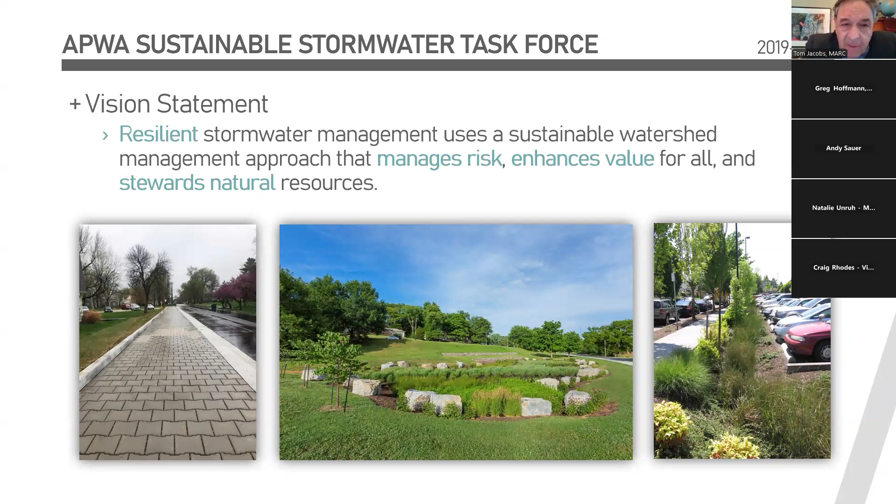On the background here, the task force recommendations charged us with doing a whole bunch of different things. It's important to note that the first one is really to combine water quantity and water quality design standards. All the way back in 2003, when we began the last update to this process, we said we want to combine quality and quantity in 5600. The culmination of that work was the development of a BMP manual along with the updates to 5600. At this time, we're combining those two documents into one piece to have a more integrated approach that more meaningfully addresses this point.

The design criteria previously just addressed greenfield development, and our new proposed approach also addresses redevelopment standards, and we'll dig into that in more detail. It's an important element because according to the vision statement, we really want to make things better at every turn, and dealing with redevelopment issues creates opportunities to do that perhaps we haven't had in the past.

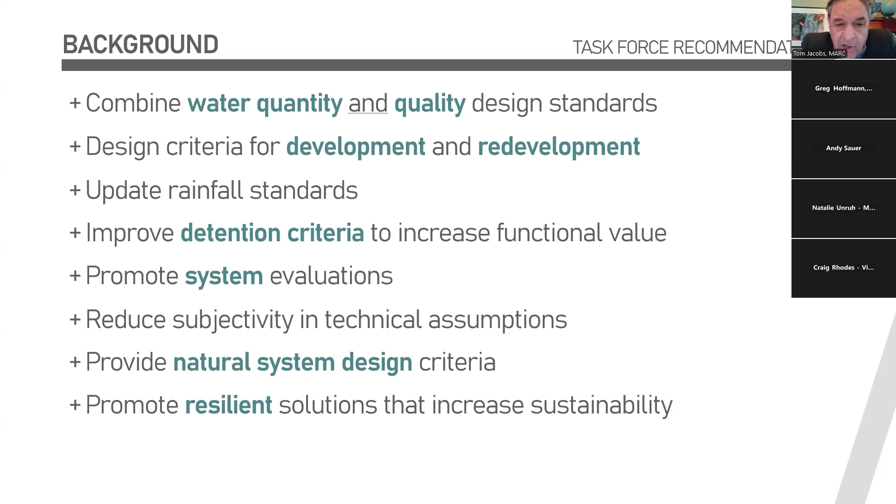All of this work began, as I mentioned before, back in 2019 with the APWA Sustainable Stormwater Task Force, and the recommendations were advanced to the full membership of APWA and the APWA Executive Board. And so those were authorized, and APWA asked MARC to facilitate the whole process.

There was actually a discussion around whether this project could be managed on a volunteer basis from within APWA membership, and there was clear consensus that the intricacy and complexity required more of a full-time administrative and facilitative approach, which led to MARC working on this. We convened, then sent out letters essentially to every public works director in the metro area asking for support and funding for this. At the end of the day, 32 communities contributed funding for this work.

Representatives from those communities constituted what we called a management stakeholders group. That group convened in the fall of 2022 to develop an RFP, beginning with the vision inherent in the Sustainable Stormwater Task Force recommendations and digging in a little bit deeper.

We managed through the procurement process in the winter of 2023 and ultimately selected a super consulting team. We negotiated the scope and fee in May, and we had a kickoff in July of that year.

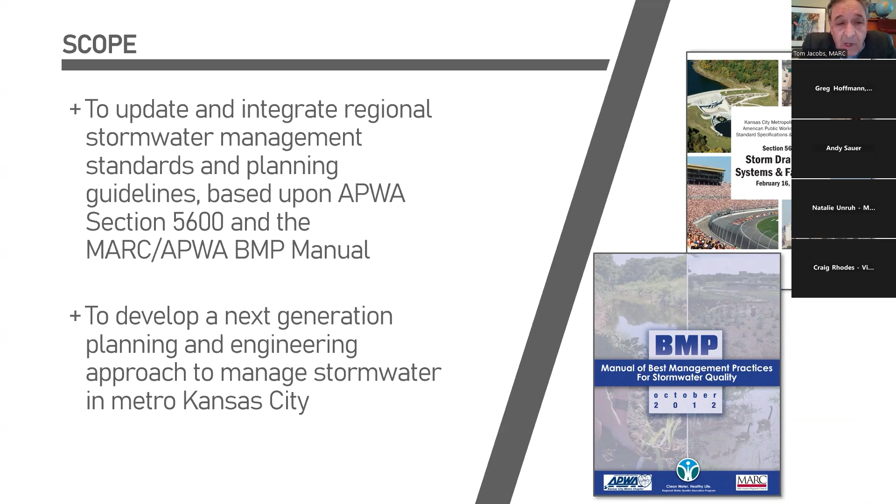As we scoped this project out, there was a desire for a very high level of community and stakeholder engagement, and we believe we've done that in spades. We're very proud of that work, and this update really reflects a new generation of thinking on how we can do a better job of managing stormwater in Metro Kansas City.

MARC serves a 9-county region in the bi-state metro with 119 municipalities. I previously indicated that 32 communities provided funding here.

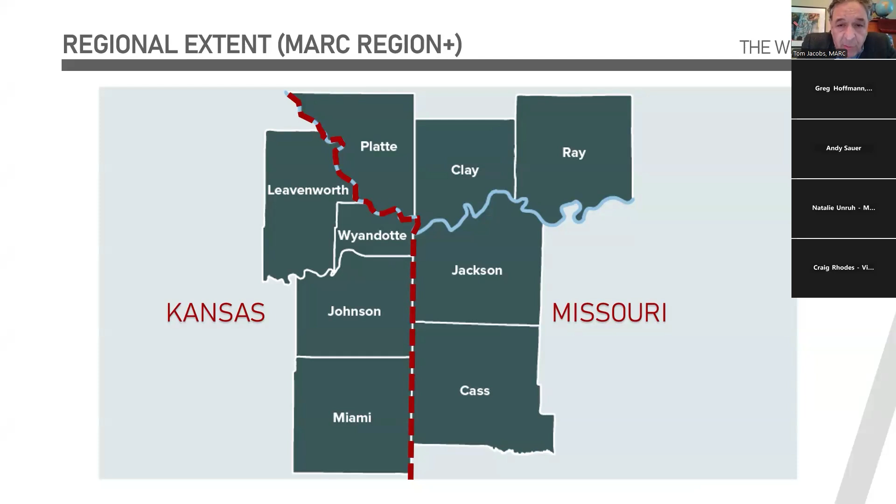Our hope is that these updates provide a consistent regional approach to stormwater that serves both large and small communities, urban and rural communities, that links quality and quantity, and that does all of this work from a systems-based approach, recognizing that our watersheds cross city, county, and state boundary lines. By having a set of common standards, we can do a better job dealing with the problems in front of us. That said, with all of the variability in our metro area, the system is also designed to have flexibility to recognize the context in which all the communities operate, so the solutions we propose are contextually appropriate.

So the team brings deep technical experience, national purview, and an interdisciplinary lens that we think is going to be fundamental to getting to where we need to go. So Andy, the floor is yours.

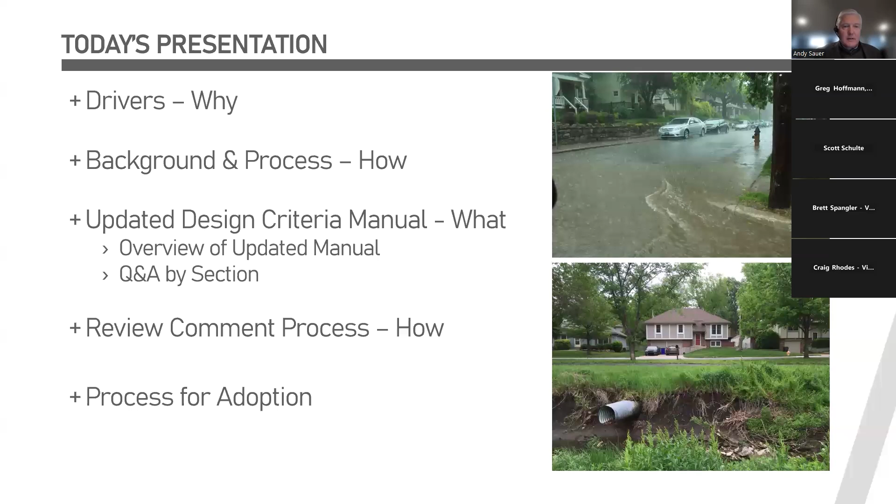Many of you have probably seen this. We've talked about this way back when we had the Sustainable Task Force, but really this was kind of the why. The big thing is we're really trying to look at ways for this metro region we can reduce the overall risk. And we have some pictures that kind of depict some of the risks that as a team we've been discussing, from more flash flooding type things to severe erosion in some of our streams, to other infrastructure that's failing because of stormwater management that isn't providing much control.

We've also tried really hard with this design standard to devise tools and design criteria, details, and specifications that will make our stormwater work harder. We want to incentivize preserving, and we'll talk about that in a little bit. And obviously many of our communities have been introducing green infrastructure for community benefits.

And the group had a lot of discussion around maintenance costs for green infrastructure. So one of our team's recommendations and motivations was really to provide additional design details and guidance, specifications, and things that we don't have in the current BMP manual, to make our green infrastructure designs much better, in our opinion, which we believe will reduce those maintenance costs long term. And so we've really focused on that.

And then trying to provide incentives and ways that we can protect and enhance our natural systems, which obviously is our lowest maintenance option if we can maintain the natural resources that we have.

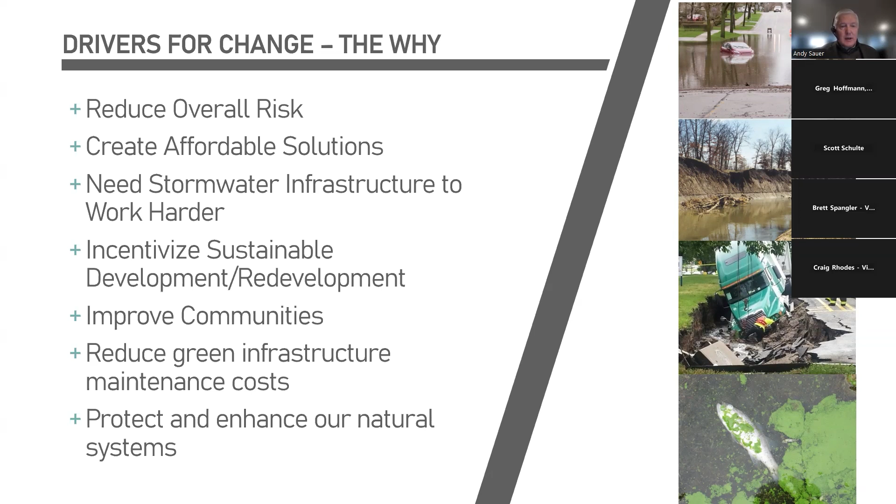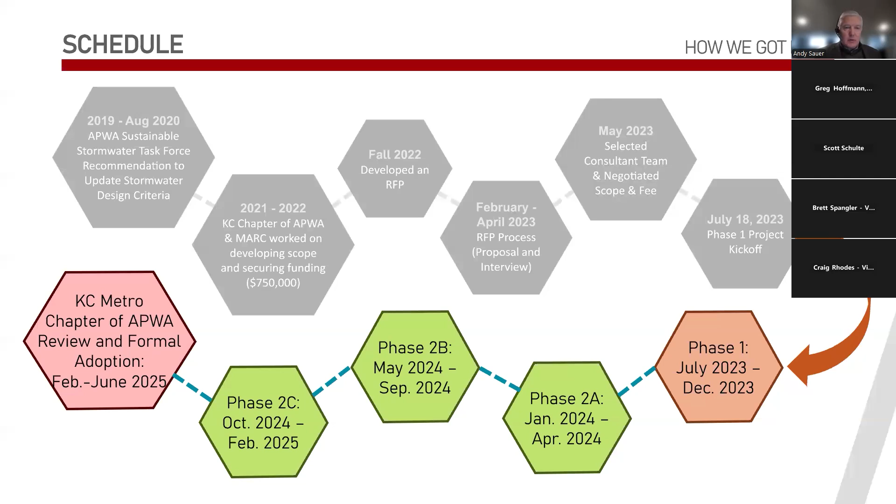I've used this before. This is kind of our overall process. Phase 1 was shown there in the first 3 steps, and once again Tom covered that very well. Next, there's some animation here.

In phase 2, which is what we've been doing really over the last year, is filling in all the content, writing the manual. Throughout this, we've been trying to engage at different levels, and I'll talk a little more about that on the next couple slides.

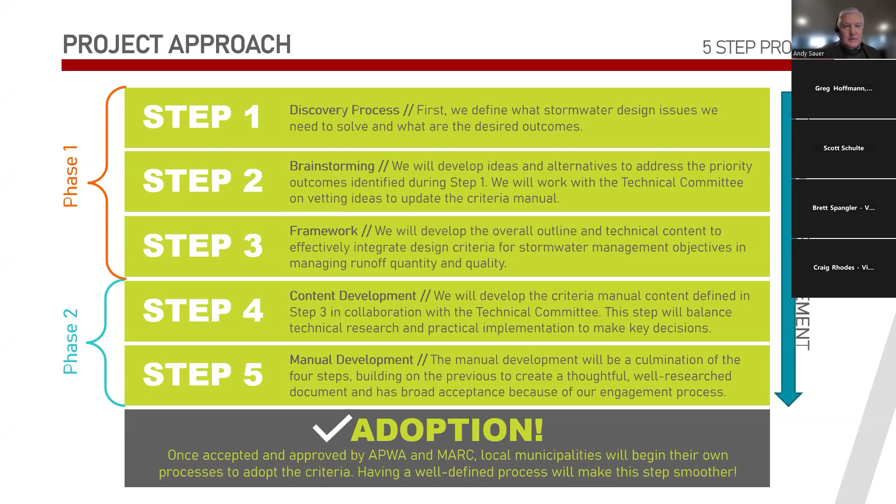In phase 1, we started off with a larger stakeholder engagement survey back in August of 2023. Then many of you were hopefully able to participate in one of our focus groups, back in September of 2023. We also had a series of technical workshops that many of you participated in—thank everybody for their efforts in phase 1.

That focuses down into a detailed framework that Tom mentioned, which became the foundation for phase 2.

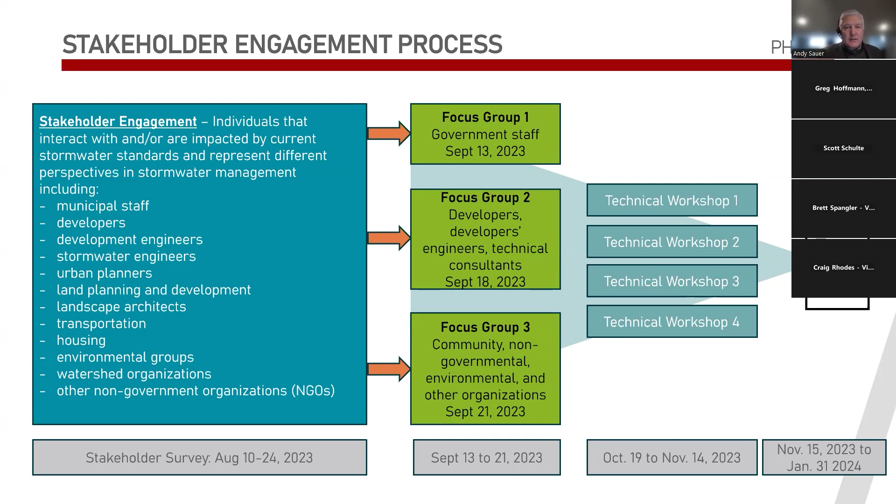In phase 2, we took that framework, that detailed outline, and expanded it to first provide one-on-one meetings with multiple municipalities to get individual input from the cities. Back in June of last year, we had an APWA luncheon that many of you attended, so we were trying to get the word out through not only meetings, but one-on-one meetings.

That led to the summer where we had additional technical work groups organized by technical topic. Those were smaller groups, and we were trying to keep those manageable. We worked through those in the summer of last year.

In August and September of last year, we also had additional focus group meetings with development engineers, and then a focus group more on the planning and policy folks. So, really appreciate everybody's input over the last year and a half on those different meetings.

In November and December, we went through a series of 4 resolution meetings. Those were 4-hour workshop-type meetings trying to work through contradictory comments, key issues, those types of things. We did those in December last year.

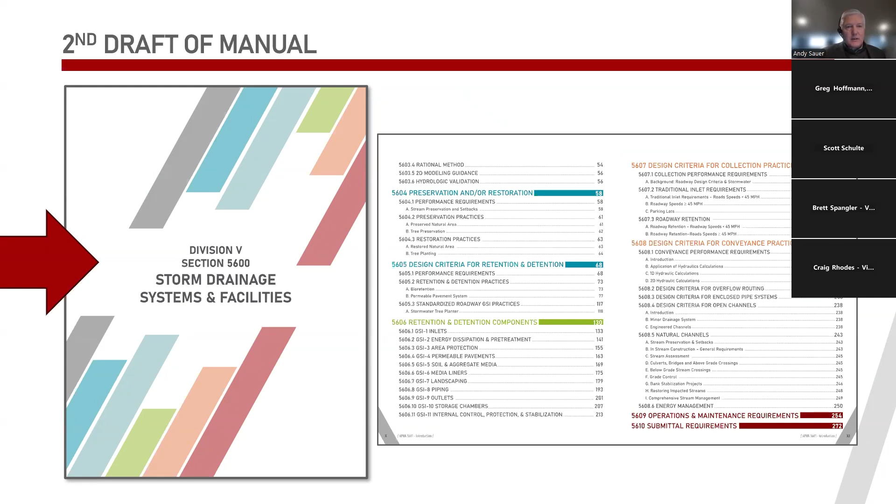I'm going to cover these fairly quickly so we can stay on time, but just wanted to cover a few things.

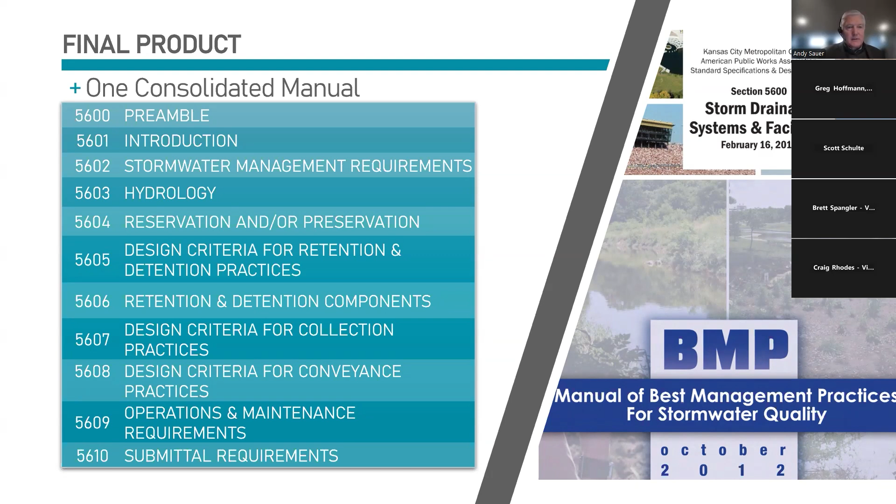One, it's one consolidated manual. We're using the 5600 layout, but you'll see all the section numbers—maybe familiar numbers—but they're going to represent different technical criteria now. That's the outline we'll be going through. That's the new table of contents for the new manual.

The big things that have changed—I want to draw your attention to what I'm calling the top 10 list, and I'll touch on a few of these that are in bold, in the different color. We've talked about one manual. The other big thing is we're moving to a runoff reduction method, which will replace the BMP value rating system. We're also moving to a layered approach for stormwater management—I'll talk a little more about that later.

The triggers for stormwater management are slightly different, a little more restrictive. We're updating the rainfall volumes, duration, and distributions. One thing I'm really excited about, and I think will make our stormwater infrastructure work harder, is we're allowing retention and detention to work together. So when you do retention-based practices, you'll be required to do less detention. That's one way we can make these solutions more affordable and work harder.

We have specific design requirements now—there's a lot of detail in there. You'll see this new manual is over 300 pages long with a lot of detail and specifications.

We have design components that Lauren will talk about. We've really spent a lot of time with Vireo's assistance on better landscaping criteria based on real lessons learned over the last 15 years. We really think that's going to help with lowering maintenance as well. We now have operation, maintenance, and design submittals as separate sections, really highlighting what's required for operation and maintenance as well as design submittals.

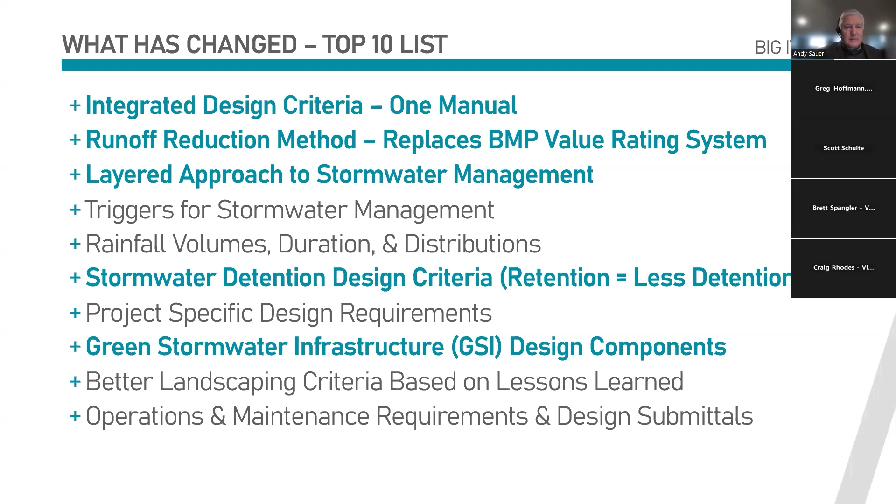I'm going to touch on these for everyone's background. I won't have a lot of time to get into details, but by combining the quality and quantity criteria, we're eliminating the conflicts between the two manuals that have happened in the past. We're hoping these changes will reduce the overall cost to provide stormwater management at a site level, and we think this will improve the functional value as we move forward. Those are some key benefits.

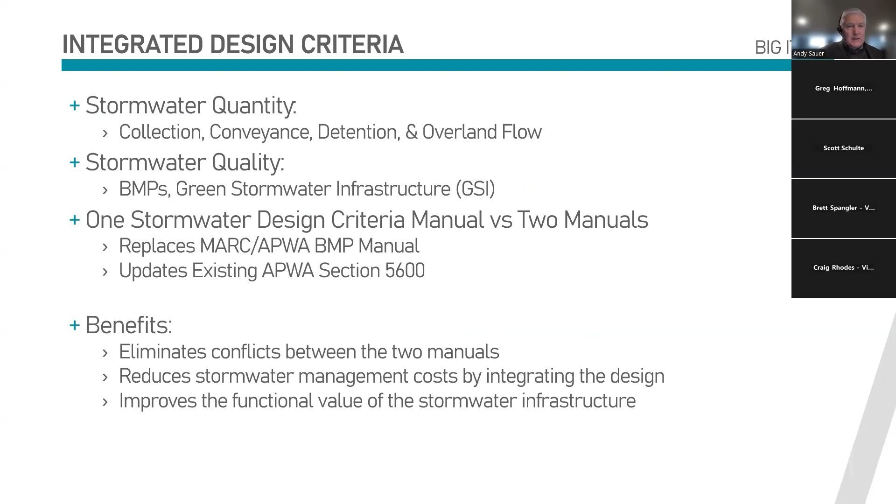On the runoff reduction method, this has been an important change. We want to retain stormwater on site, and that doesn't necessarily just mean infiltration. As these systems are vegetated, we get canopy interception, evapotranspiration, and extended filtration with underdrain.

So when we talk about retention, I want to make sure everybody understands we're not saying everything has to be 100% infiltrated. We're providing opportunities, and nature itself will evapotranspirate the water. Every volume or gallon of water we can retain on site gives us 100% pollutant removal, which is a much better benefit from a water quality standpoint.

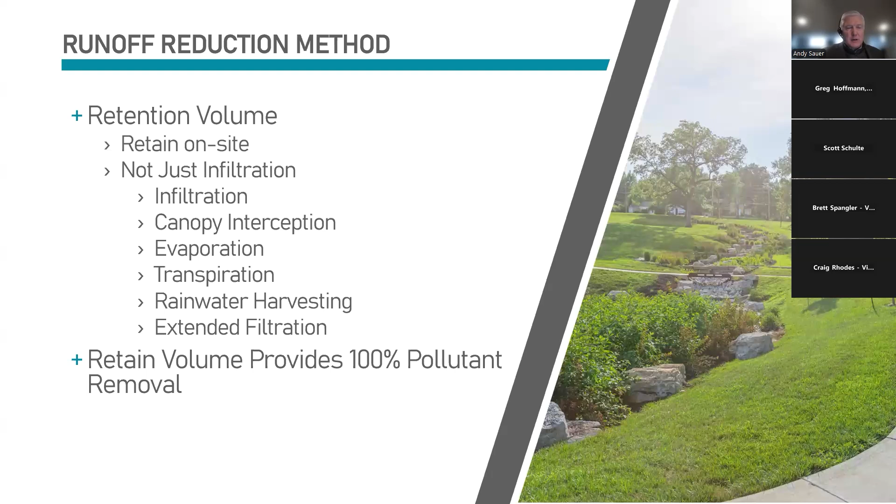We also know that this runoff reduction volume method is used in many states, so we're not on the cutting or bleeding edge here. You see the trend of moving to more of a runoff reduction method across the country, including the state of Kansas with KDOT's requirements for a half-inch retention on site. We feel that we're aligning with the state of the practice across the country.

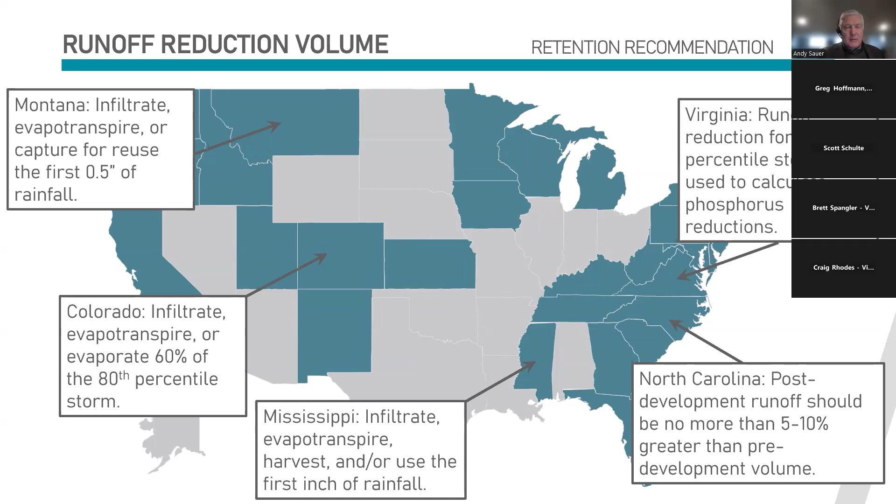Retention and detention are now together, so when you retain on site, you'll be able to take credit for that, and we'll talk a little bit about that later in the calculations. We're providing design tools that will allow you to calculate that reduction in detention sizing.

There are a lot of benefits listed, but one key thing I want to point out is it reduces the footprint area of the on-site stormwater management. We've run multiple scenarios with real projects, which will be included in the appendix materials, to demonstrate that the new manual doesn't require additional footprint area in most cases, and we'll get additional value as we move forward.

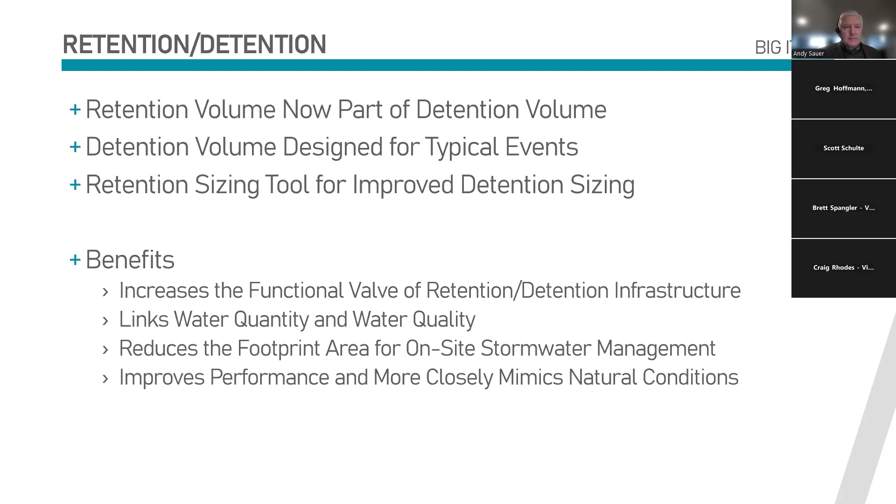Layered approach. Lauren's going to talk more about this later, so I won't go into too much detail, but you see the layers there: first preserving and restoring, then retaining, and then detention. The manual and requirements are laid out that way, and you'll see that here in a few minutes.

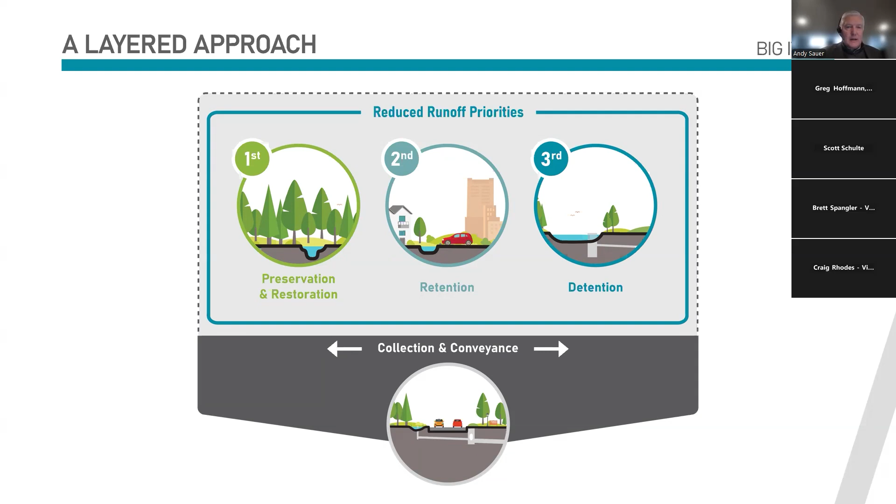Our design components—this is just one rendering. We have a lot of renderings and details, but we also have details by component: how water comes into green infrastructure, the piping, the soil media, and the storage aggregate. We hope this will improve the overall consistency of designs across the metro area and lead to lower maintenance and higher functioning green infrastructure.

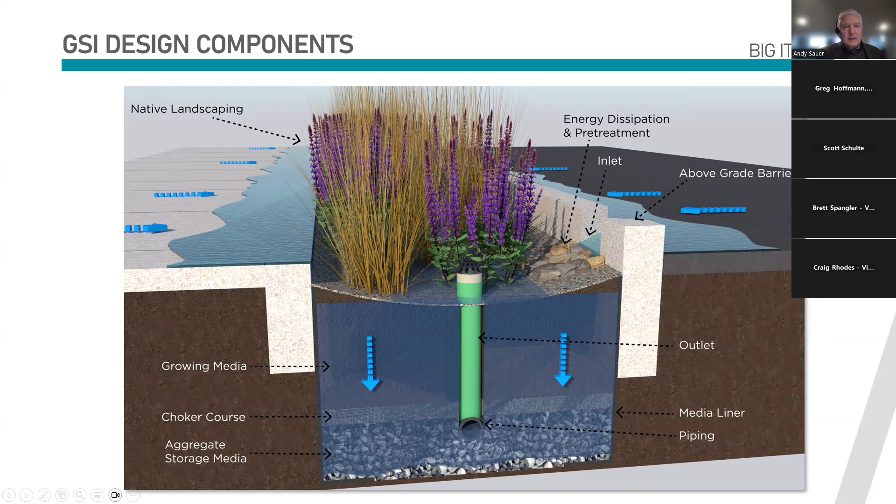All right, let's talk about the manual. That's just the background—let's get into the nuts and bolts.

We are requiring, because we'll have a lot of comments, which we appreciate, two ways you can make your formal comments. We have a Bluebeam session out on the MARC website that you can click on, and if you're familiar with Bluebeam, you'll be able to go into the PDF and make comments directly there. We've also provided a digital survey form by section.

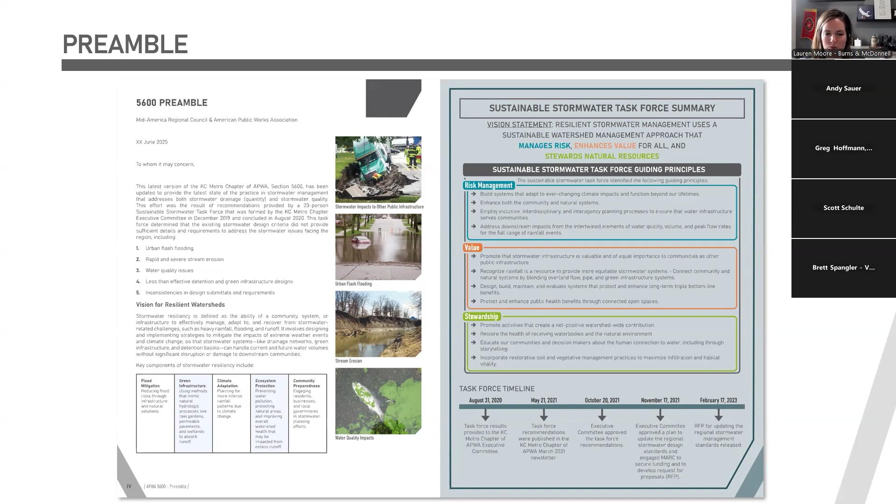So we're going to walk through each section of the manual, starting with the preamble and the introduction. We've got a preamble on the front end that provides a lot of the background information you just heard Tom and Andy go through, talking about the timeline, the Sustainable Task Force, and really a lot of the why behind the manual updates.

We then start to get into the meat of it. We've got the introduction that starts into talking about the different project types, so we define these up front. Really the manual is trying to take an equitable approach to applying stormwater criteria to different project types rather than the previous one-size-fits-all requirements. The goal here is to better balance mitigating impacts to how stormwater is managed from a site or project with the feasibility of meeting those standards, really with the intent to have fewer total variances because the criteria is better aligned to the project type.

So we've got criteria that differs from new development to redevelopment. Lesser quantity control is required for redevelopment projects, but we still want to promote redevelopment opportunities while providing some level of stormwater control. And then we define three different project types.

So we've got site development, which is really your traditional type of development - residential, commercial, industrial type projects - but also includes solar farms and non-linear municipal utilities or utility facilities. Both public and private is the key there, so we're applying these standards to everybody.

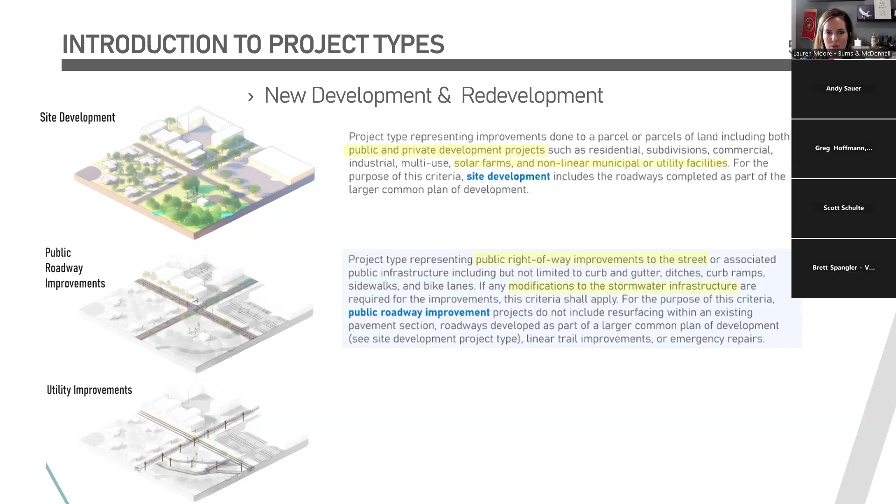The second type here is public roadway improvements - that's within the public right-of-way to the street or associated public stormwater infrastructure. Public roads make up upwards of 30% or more of our impervious area, sometimes even more, so they're a major contributor to stormwater runoff and a major factor in how we're able to manage it. A couple things to point out though - it does not include resurfacing within an existing paved section, linear trail improvements, or emergency type repairs, as well as roads developed as part of site development - that falls under the site development category. So this is intended to fall into the public roadway improvements only.

And then the last project type here is utility improvements, meaning linear utility improvements - so gas, communications, water, sanitary, stormwater improvements. In general, these types of improvements are exempt from a lot of the stormwater management criteria, but if you're impacting the storm system, you're still required to meet the collection and conveyance criteria.

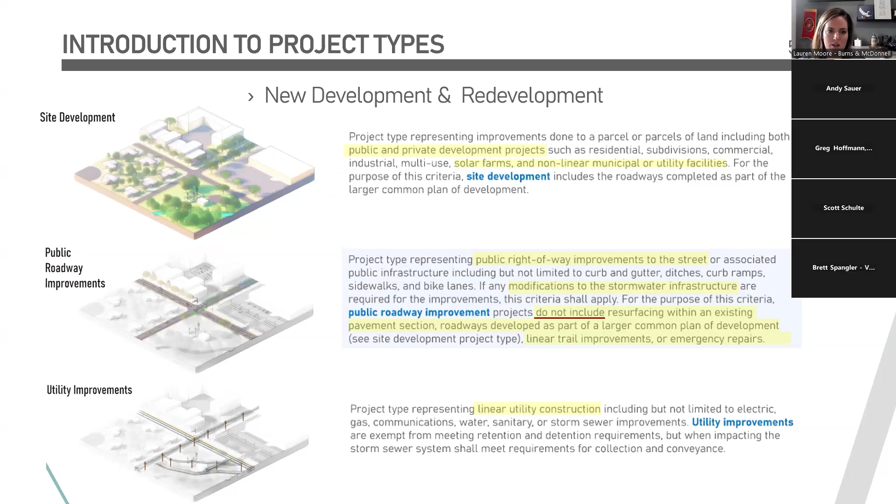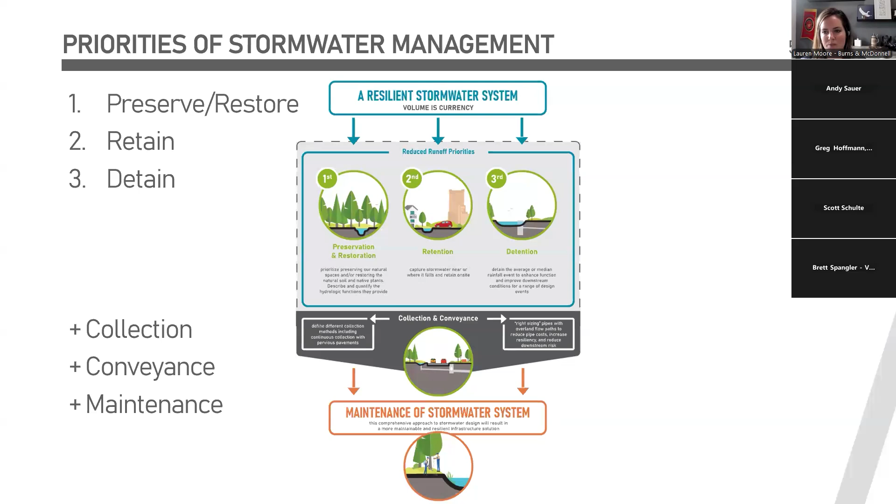As Andy mentioned before, we've set up the entire manual around this layered approach, or these priorities of stormwater management, looking to really promote preservation or restoration first - that's our cheapest and easiest way to manage stormwater naturally. Then moving to retain what we can on site, and third in that tier is detain. At the bottom you'll see collection and conveyance, because those are really components of the storm drainage system that happen at any given point within those priorities. And maintenance is really a key component in making sure these assets work long-term as well. So the entire manual is really set up and structured around these priorities.

So the last section in the introduction is how to use this manual. It really walks the user high level through the content of each subsequent section. It also calls attention to our Appendix A, which is the definition section.

We've got blue bolded text throughout the manual that highlights a defined term that you can go find the associated definition for in the appendix. Those terms are bolded the first time they appear in a section, like 5601, or a subsection like 5601.1, 2, 3, 4, 5. That's just to give that definition around the context of that important term if you're jumping to a single section or subsection.

So 5602, we've got stormwater management requirements that I'll talk through here in a second, but it's really the first stop for the user to understand what controls are required for their site based on their project types.

5603 is hydrology. So what are the rainfall inputs and the appropriate methodologies that we use to calculate those requirements? There's references here to the relevant appendices that really support those sections too.

Then 5604 through 5608 really gets into the detailed design criteria. So now that you know what you have to do for your site, this defines how to design each of those components to meet those requirements, starting with preservation and restoration practices, retention and detention practices and their components, and then collection and conveyance.

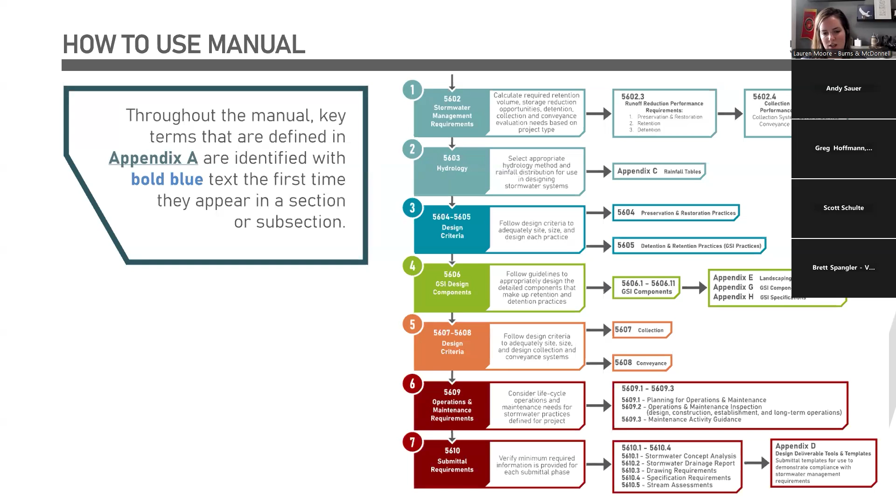That brings us into 5602, which is the stormwater management requirements. We start off this section talking about applicability of the criteria, and this is not dissimilar to how the current 5600 starts, but the criteria applies to all new development and redevelopment, both public and private projects, and then references those project types again.

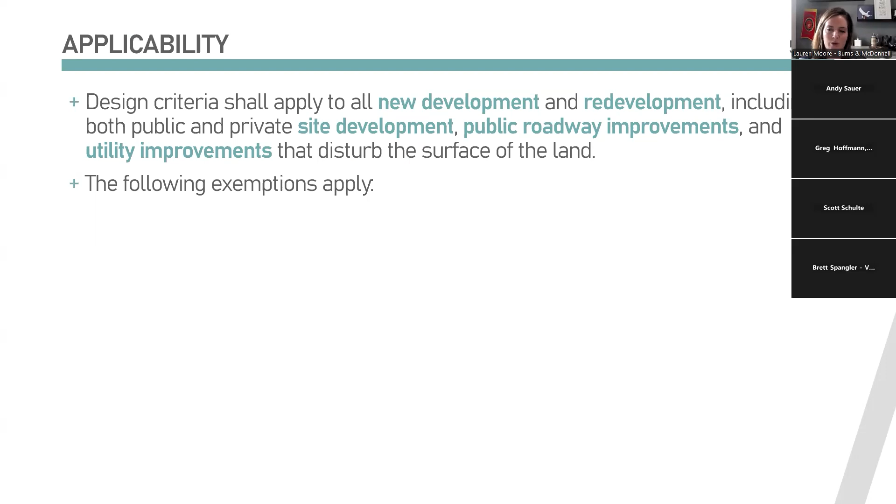Similar to the current 5600, there's a list of exemptions. This time around, we are basing the exemptions on disturbed area rather than just impervious area. This was really to better align with regulatory requirements around MS4 and to acknowledge that stormwater management is impacted by much more than just impervious area.

So the first exemption has to fulfill both requirements, but basically, if a project disturbs less than half an acre and has less than 5,000 square feet of impervious area total, there's no stormwater management required. So if it's a smaller site that does not have a significant impact on impervious area, you're exempt from the requirements altogether.

The second exemption is related to single family and duplex developments that are not part of a larger common plan. So this is not subdivision type development - these are individual lots being developed by a single homeowner. But if it meets either of these criteria, it's exempt: if the lot size is less than 1 acre, you have no stormwater management requirements, or if your impervious coverage is less than 35%, you have no requirements.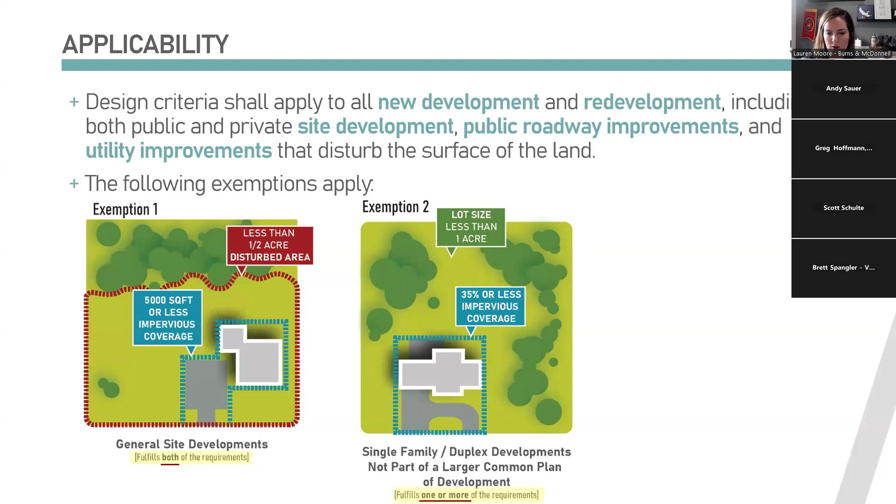And then the third exemption, again consistent with current 5600, is if stormwater management has been provided as part of an earlier approved phase of work, assuming fully built conditions, there's no additional requirements that apply. So if you've got a phase development that handles the stormwater management up front, you're not expected to redo that each time you enter into a new phase of development.

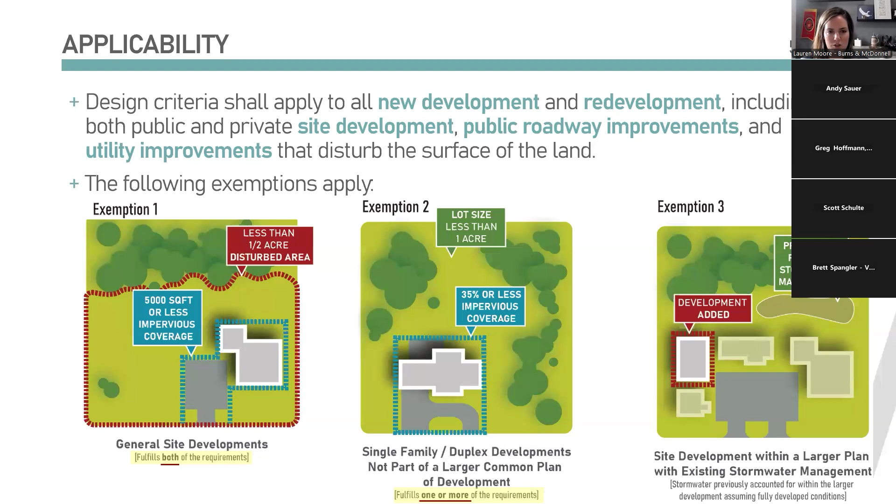So there's a couple flow charts in there too, really just to help walk the user through those exemptions and whether or not stormwater management applies on their project.

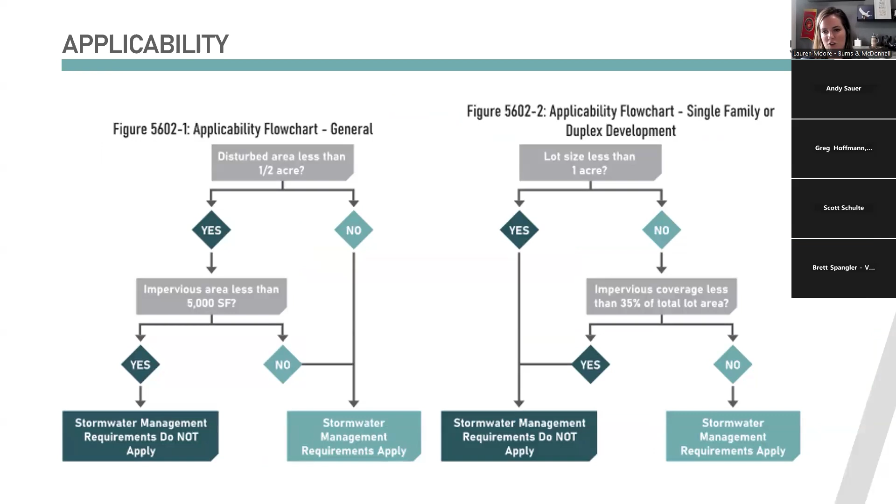So then we really get into the heart of the requirements for runoff reduction method that Andy had introduced before, again starting with preservation and restoration, then going into retention, and that's really controlled by the runoff reduction volume, or RRV. You'll hear me say a lot.

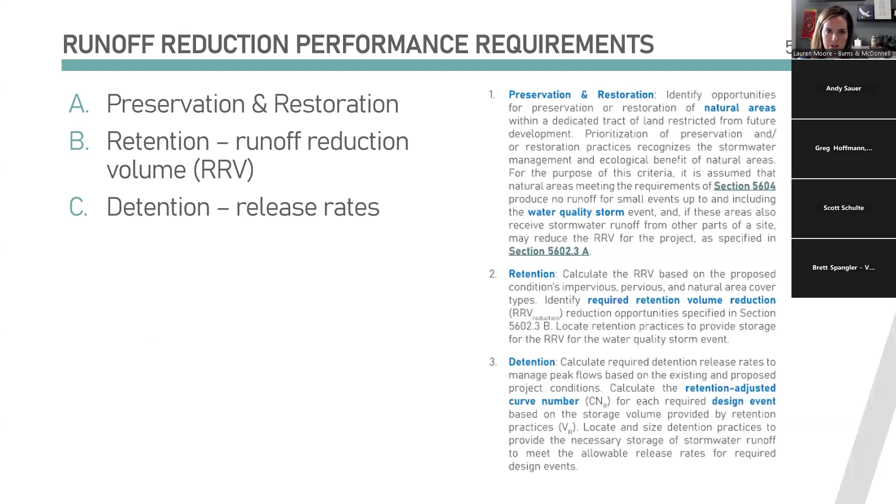And then detention, which is still built around release rates. Aligning with the priorities of stormwater management, the manual starts with preservation and restoration. The only real hard requirement around preservation and restoration is related to the stream setbacks, but there are a lot of incentives to reducing your RRV, which we call RRV reductions, that are also introduced in this section.

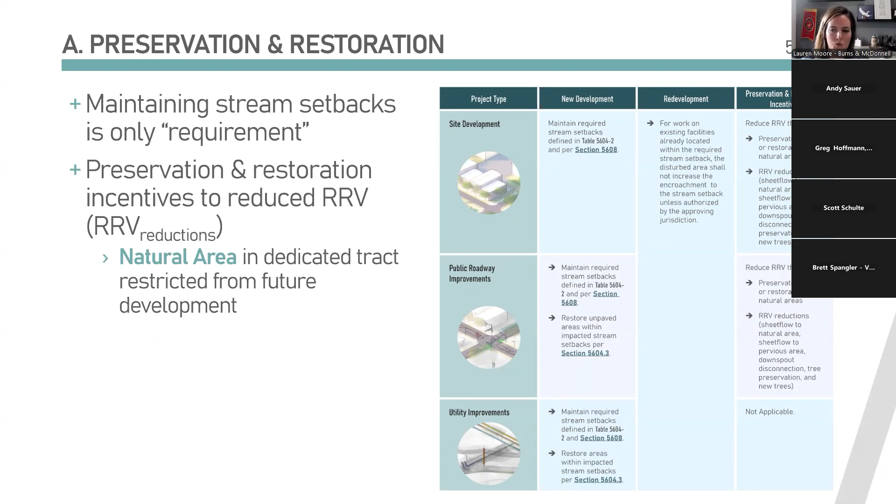We define the term natural area, which is used to describe preserved or restored areas of a project that have been put within a dedicated tract restricted from future development. So here's some of the RRV reductions that are introduced in this section.

If you incorporate these type of practices into your site or your development, your overall runoff reduction volume requirement goes down. Each of these has an associated credit that comes out of the total RRV for the site. This section is set up with equations and graphics to help the user walk through and apply those. One thing I want to point out is that natural areas, whether they're preserved or restored, are really double incentivized if being used to manage stormwater.

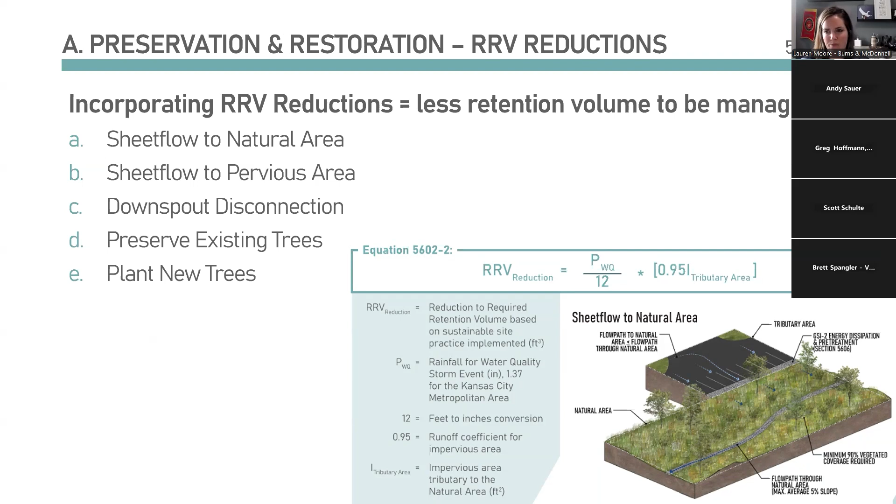So then we get into the retention section. Again, you see the performance requirements table by project type. You'll see this consistent table that lays out what those requirements are, so ideally the user can grab that information quickly up front. You'll see that new development has significantly higher control requirements than redevelopment, again trying to align with feasibility and available space for implementation.

One other thing I want to point out is that the linear utility improvements are really exempt from the runoff reduction requirements, just because of their limited impact and limited options to be able to control stormwater when we're talking about a linear utility.

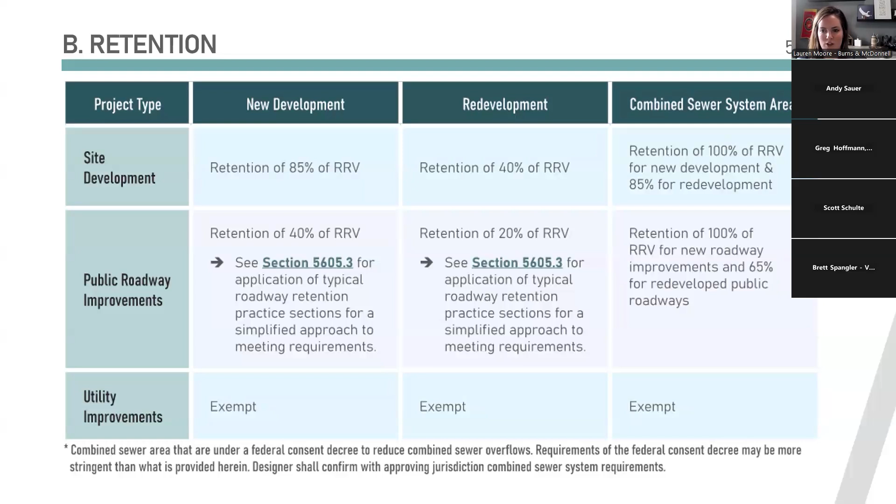There's also requirements included for combined sewer areas. Really, retention has the biggest positive impact on CSO issues. So increased control requirements in combined sewer areas helps align those requirements of our major CSO communities with their existing standards and consent decrees.

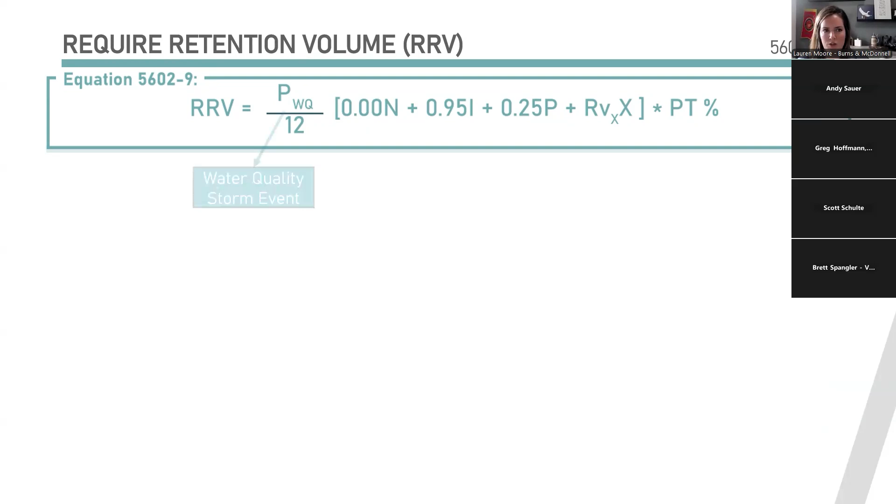Just walking through these parameters, P is our water quality storm event. It's that rainfall depth, which is still 1.37 inches. N represents our natural area, and yes, 0.00 is intentional, as the calc assumes no runoff from natural areas.

The intent here is to really over-incentivize this to promote this type of practice. It's easy for the user to see how big of an impact incorporating the natural area for preservation or restoration into your project can have on your total site RRV. So ideally, you're looking at these opportunities up front to reduce your total stormwater management requirements for the whole project.

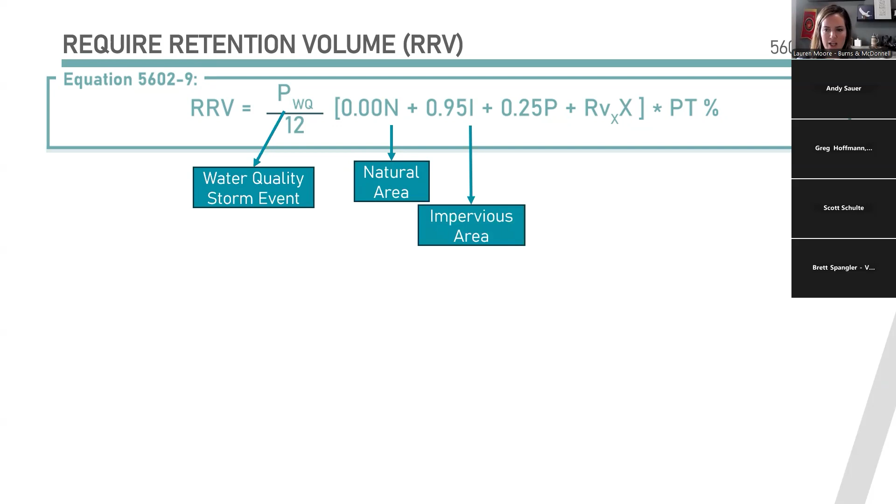We then have impervious area, and then pervious area, which is really generic pervious area. And then we've got some unique land covers defined as well, like for solar panels, gravel, and turf. Those were some of the nuanced pieces that came out of the resolution meetings for different land types that we see questioned quite frequently, and also part of development in the KC region.

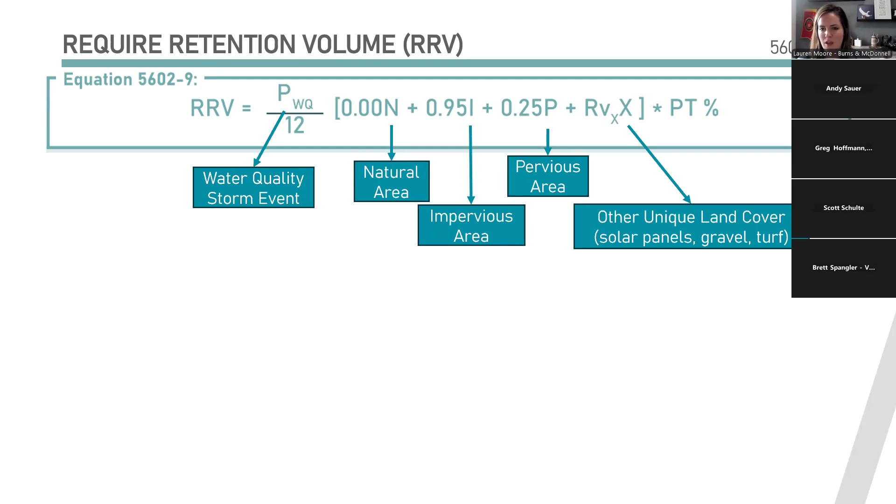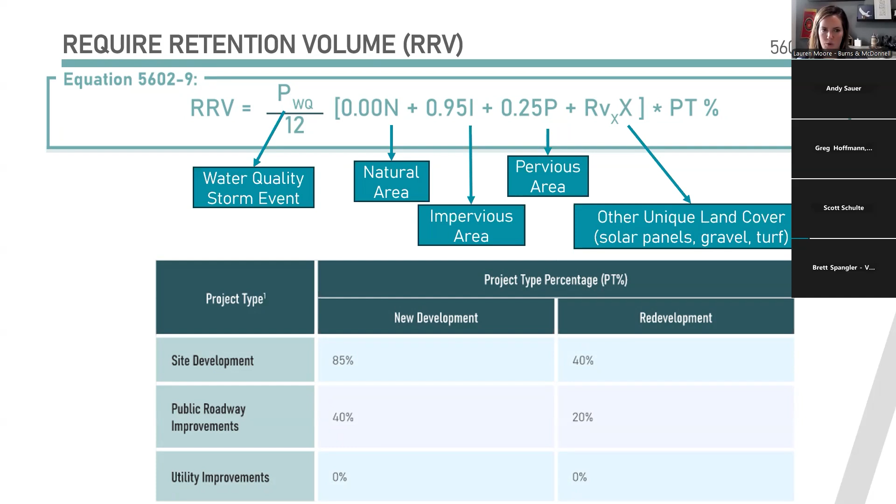And then the last piece on here is the PT percentage, which we call the project type modifier. Basically this is that reduction factor that you get to apply to your total equation based on your project type and whether it's new or redevelopment.

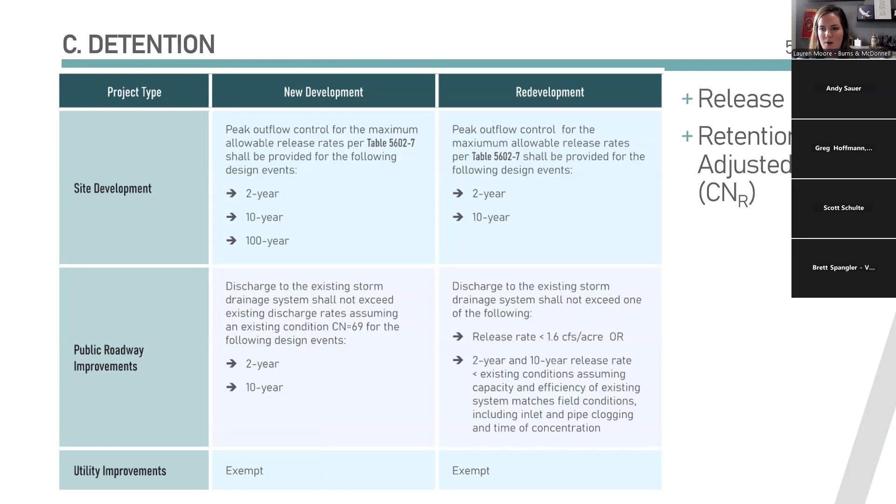Then we move into detention. So detention requirements, again, defined by project type. It's similar to the current 5600 in that detention is managed by controlled release rates. But the emphasis has really been changed to focus on tighter controls on the more frequent storm events, so 2-year and 10-year, so that detention is providing a benefit most of the time rather than only during those more extreme events.

We're really trying to make our infrastructure work harder for us rather than in those less frequent times. A big thing we want to point out here again is that you get to take credit for the retention volume provided upstream by applying a lower overall curve number that factors in that volume as part of the initial abstraction. So that's going to inherently reduce the amount of detention that you have to do by meeting those retention requirements upstream.

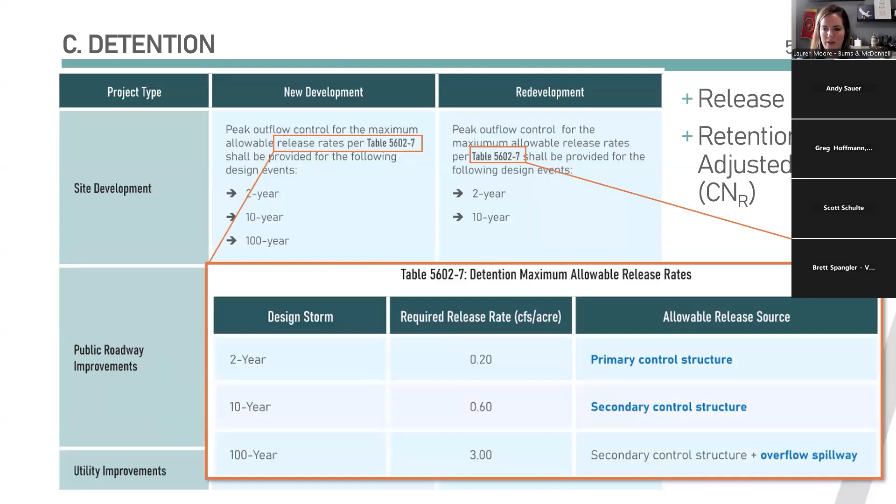Formerly, water quality and detention were really completely separate and had to stack those requirements.

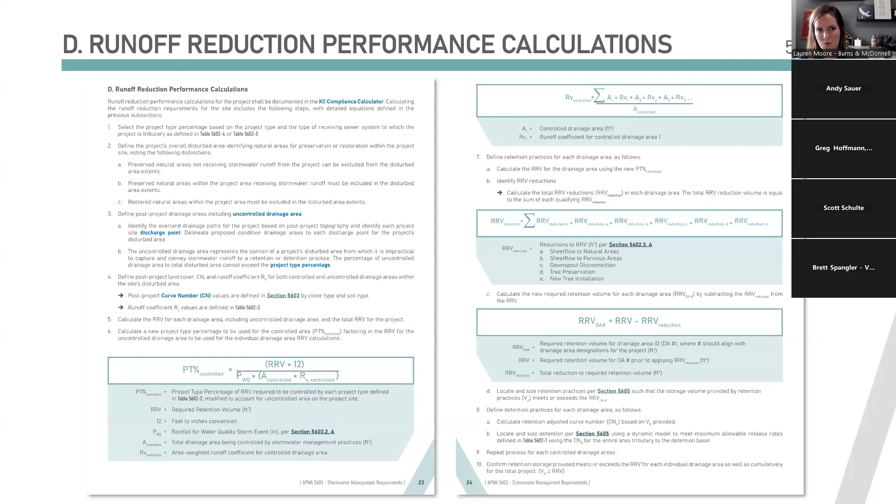The last subsection here covers runoff reduction performance calculations. I don't expect you to be able to read these, but I wanted to give you a screen grab. This walks you through step by step the calcs and equations introduced in the previous three subsections, and it aligns with a KC compliance calculator tool that we developed, really trying to make this a smooth and easy process for the user.

That KC compliance calculator is part of Appendix D. It's a macro-enabled Excel file, so we've got buttons, user inputs, and auto-calculated fields to make this pretty user-friendly. That's posted on the MARC website as well, so I encourage you to download it and play around with it. For now, we've left it unlocked—we wanted to be transparent about how it's built and the calculations and assumptions going into it. But when we finalize it, we'll lock it down so users can't accidentally modify fields not intended to be modified.

There's a couple different tabs within there. We've got an instruction sheet up front with instructions by each tab, hopefully making it nice and easy to use. Then we've got site inputs, where you input your drainage areas and understand your total RRV requirements. And then we've got detailed design sheets, where you can calculate your RRV reductions, retention volume, and detention for each of the drainage areas on your site.

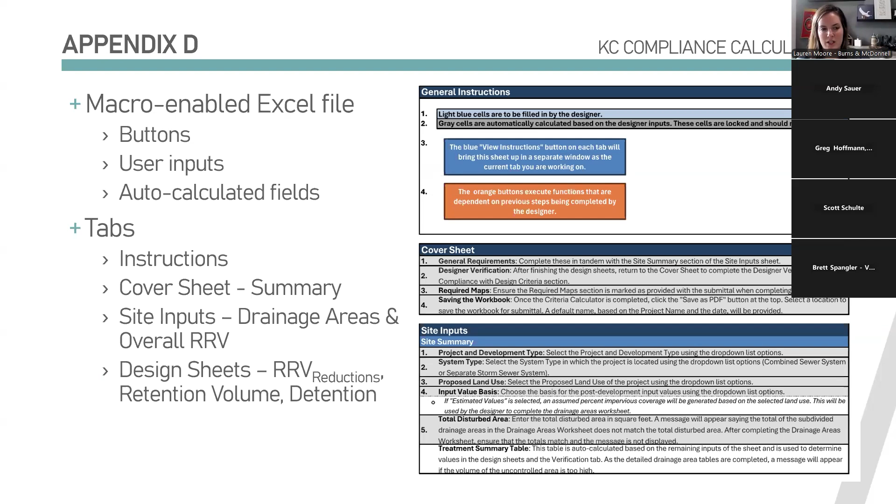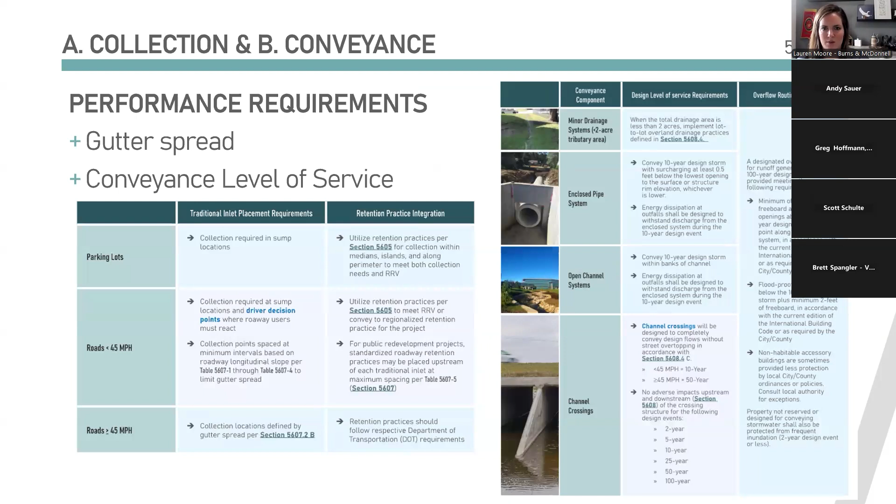Then we move into the collection and conveyance performance requirements. This isn't novel—these are still curb and gutter spread and conveyance level of service. We'll talk about these in more detail in later sections.

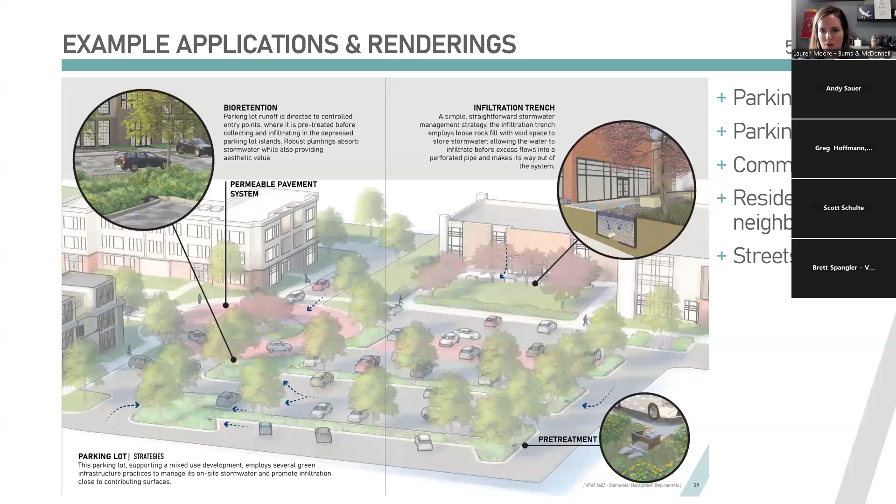Last but not least in this section, we've got example applications and renderings. The intent is to give an idea of how retention practices can be integrated into different types of development, promoting multi-benefit, multi-purpose solutions that can enhance the value of a project rather than sticking a big hole in the back corner and going straight to detention. So we've got renderings and text walking through scenarios like parking lots, garages, commercial infill, residential development, and streetscape.

With that, I think we can move on to 5603 Hydrology. Thanks, Lauren. I believe some folks joined—Matt Scott with Black and Veatch. I'm going to walk through the hydrology section here. Next slide.

We'll start each of these sections moving forward with a quick look at the table of contents. Within hydrology, we have it organized as shown: first is application of hydrologic calculations, so the intent is to walk designers through step by step how to apply this section when developing a site or applying the calculations. Then we cover meteorology and the rainfall depths and rainfall distributions. Then runoff generation methods, getting into the details of hydrologic calculations and watershed calculations. And then finally rational method and some brief 2D modeling guidance.

There's a lot of good references that exist relative to different modeling platforms. What you'll find upon reviewing the manual is an overview of best practices, expecting those doing 2D modeling to follow the specifics of their modeling software appropriately. And then finally, hydrologic evaluation—I'm not going to step into each of these in detail, in the interest of time.

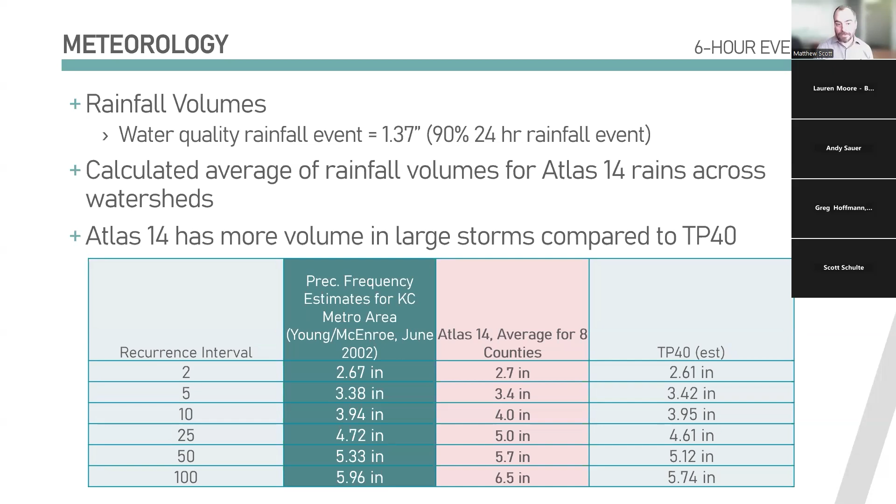So we see a lot of alignment for the more frequent events, and then with Atlas 14, as we go to the less frequent events, there is a divergence. There's some larger volumes there. Just wanted to point that out for context, and that is one of the more significant changes in the hydrology section of the report manual.

The next thing you'll note is some different guidance relative to rainfall distributions. You'll see 2 different rainfall distributions. First, for inlets and conveyance, or collection and conveyance, there's a nested distribution, shown there plotted on the left in 10-minute increments. That's a 6-hour storm. We did a review of available data and reports, and this was where we settled based on that and some hydrologic modeling of watersheds as being a good representative for the KC metro area for a 10-year 6-hour storm.

For detention, there's a different distribution, NOAA Atlas 14 temporal distribution, and you'll see that it's very front-loaded. NOAA Atlas 14, in one of the appendices, looked at historic rainfall events. This distribution represents kind of an average of rainfall events rather than the most extreme. So this is the distribution you'll find in the manual for detention.

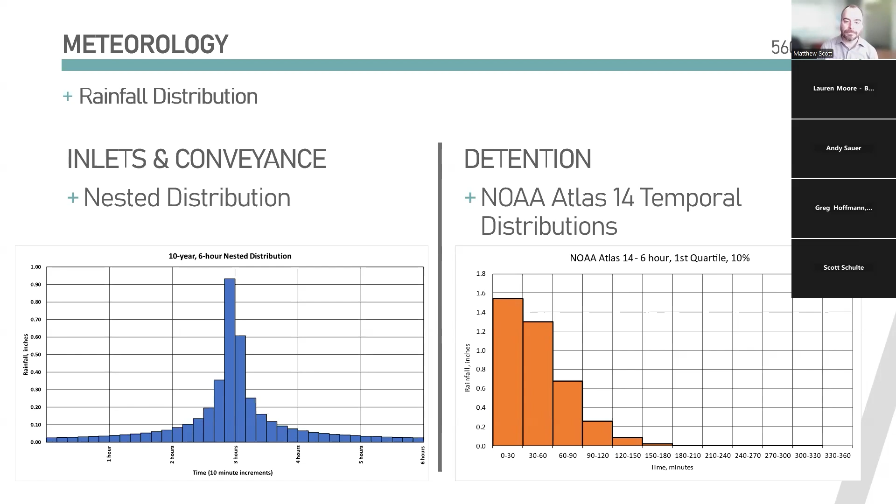Another change with the rational method, and this was a topic through all of the engagement with stakeholders, but it was in the manual, you'll find the rational method is limited compared to previous iterations of the manual. It is only allowed to be used for a peak runoff rate to a single point on collection and conveyance components, and this is only for drainage areas less than 40 acres.

And it's really only appropriate for unmanaged drainage areas, i.e. there's not reservoirs that are significantly changing the flow regime upstream. And as I mentioned, it's only allowed for calculating inflow to a single drainage element like a culvert or a single inlet.

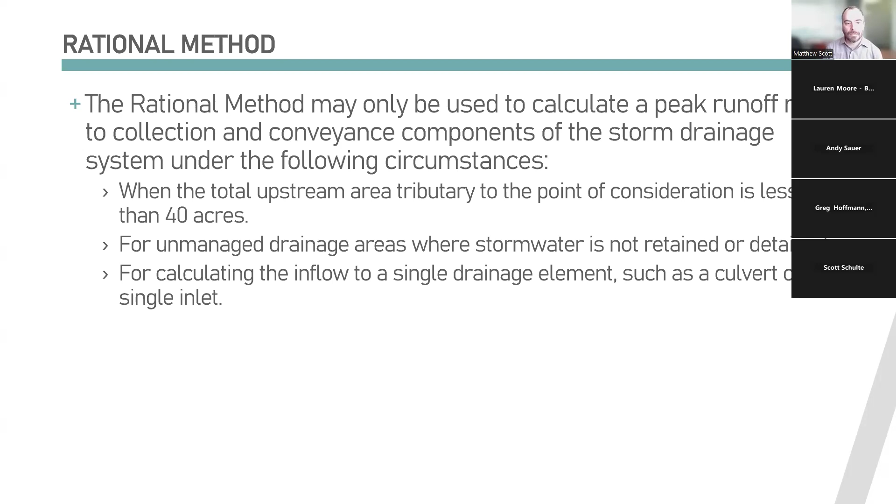And then finally, you'll find more detailed rainfall data in Appendix C so that you can create these storm distributions, and especially the nested storm distribution. These are area-weighted rainfall averages for the MARC region, again, just relative for different recurrence intervals and a variety of time intervals for the designers to use.

Next slide. So I guess, Lauren, at this point, we have a Q&A session if you want to introduce that.

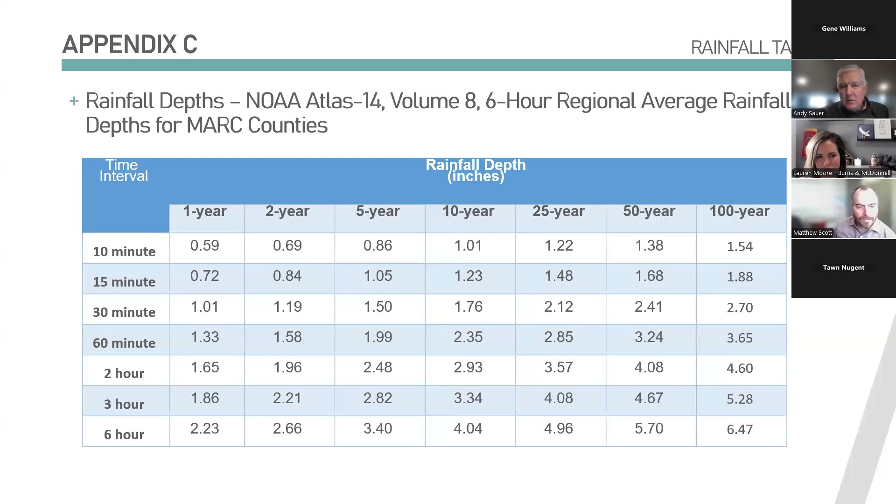We do have a few questions now coming up in the chat. One from Matt here, about the 10% detention design frequency within these storms, and not 10% for a given time interval. I think they might be referring to the 10% quartile, maybe. Yeah, I think Brian, maybe you can elaborate a little bit more.

Sure, I'll come off mute. When I think of a 10% storm, maybe it's just my lack of understanding of the temporal distributions, I typically think the return intervals for a given depth within each duration are about 10%, but my understanding is the temporal distributions aren't like that, they kind of range quite a bit. So I guess if you could educate me on what they mean by 10%, for example I noticed on your chart you had a 10% one as an example, so just hoping you can elaborate a little bit on that.

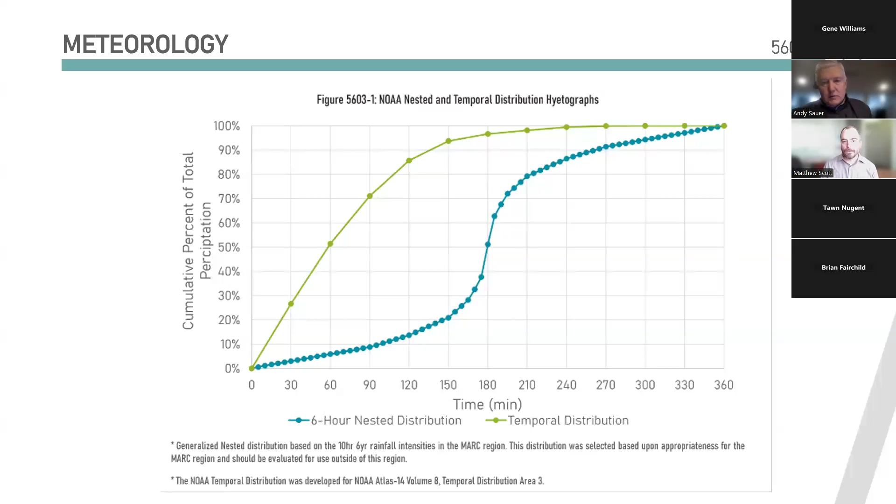Yeah, so the 10% really refers to the total event rainfall volume. There is a variety of recurrence intervals because it's based on historic data rather than a constructed hyetograph like the nested one. Because it's based on historical data, you do see a variety. So to answer your question directly, it's a 10-year event because the total volume of the rainfall event corresponds to a 6-hour rainfall volume. But the 10% means that 90% of all 6-hour storms were less than or equal to that, right? So we're using the 10%, the least frequent of those events. It gives you distributions from 10% all the way to 90% within that 10 years. It's a difficult one to present, but we'd be glad to talk more about that if you have more detailed questions.

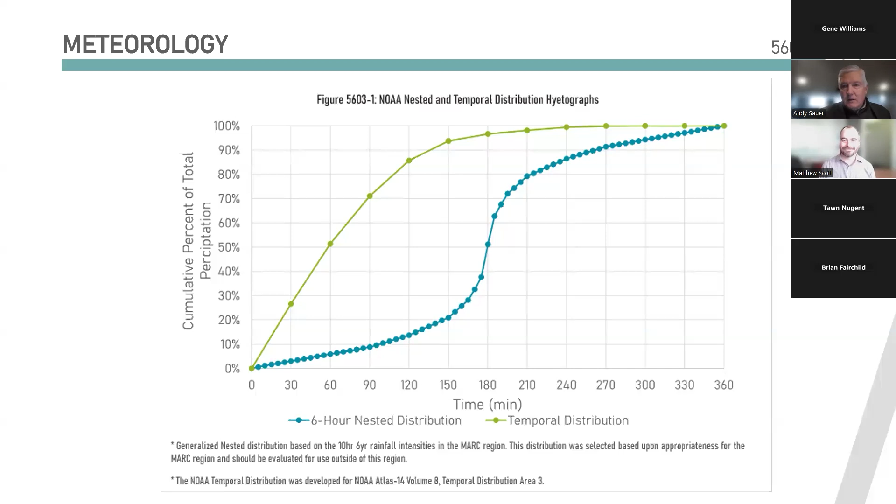We've had a bunch of questions pop up. One from Logan Healy: am I correct that tear down, rebuild, single family home construction would be exempt, and if so, why? If it falls below those thresholds, it would be. So if the property size is less than 1 acre, or if it has less than 35% impervious coverage. This was a pretty hot topic that we debated in those resolution meetings, and voted with the management stakeholders on a different range of triggers for that. Really the intent is to not put undue onerous on development for a single homeowner on a lot that's frankly harder to control, both from the homeowner side of things and from the municipality side, as far as regulating and actually implementing successful BMP practices. So if they are larger, if they fall outside of those thresholds, then the stormwater management requirements do still apply.

Okay, we have another question from Kevin Roner: how does the new criteria coincide with KCMO's criteria for CSO requirements? I'll take that one. It doesn't exactly align. We were trying to find a meaningful improvement to the overall CSO requirements without making them more restrictive. So it generally does align, but not exactly, because of the way Lauren laid it out, we're trying to have this multi-phased approach. So the CSO is close to what we currently require, but not exactly. We're making it a little bit more detailed, in my opinion, so I think it's going to work better than the current criteria, which was kind of an overall blanket that I think causes more confusion. That's why we went this way. So yes, it's in general lines, but slightly different.